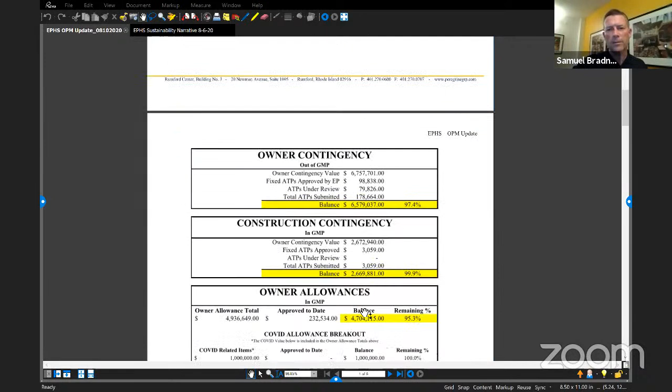This second page is a little bit of, we're trying to evolve this every month to make sure we're giving the team a good snapshot of where we stand now that we have the GMP approved. This is a little bit more layers of detail than what we saw last month, but really trying to give you the same information.

What we'll see on a monthly basis is three major blocks of allocation of dollars that are either in your project budget or in the GMP. The first is the owner contingency. When we look at the budget, these numbers tie to that. We have a total owner's contingency of $6.7 million. That is the owner's money to spend, whether it's on change orders coming out of the construction process or other items the owner may add.

What we see here is, and these numbers are a bit in transition, we're trying to reflect the changes that we know to date that have been approved by the procurement working group. That's the 98,838 number. But until we receive those changes in an official change order, the contract value will not change. So we're trying to give a real-time snapshot of what we've committed as well as what's under review, to get you to this total number, and then what the resulting math will be. There's always going to be a little bit of inconsistency because the change orders will lag behind the ATPs, but we think this gives you a good snapshot of where we are as we're starting to expend those additional dollars.

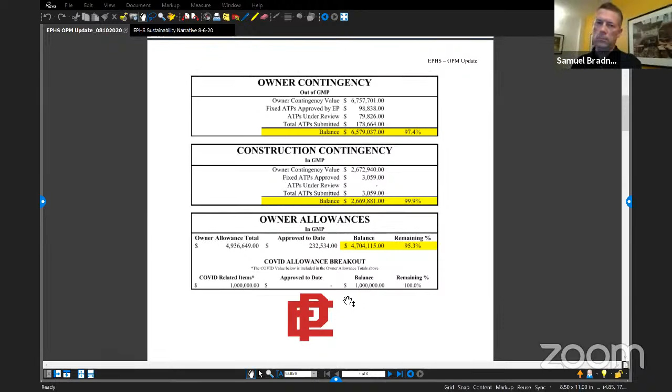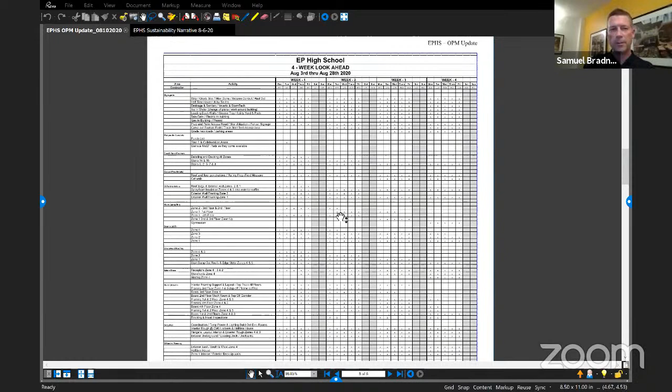So I'm actually going to use the pictures to kind of walk us through this document. And I know it can be hard for folks to read, but right now...

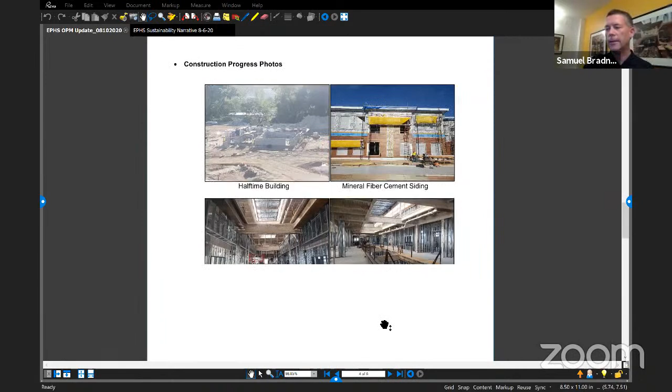We've got, and this is relatively consistent with last month, about 14 trades on site, significant work happening across all aspects of the project completion, site work, major utility work, major earthwork. This is a picture of the halftime building up here. Significant amount of earthwork happening in the back third of the property, from the building back to the eastern property line.

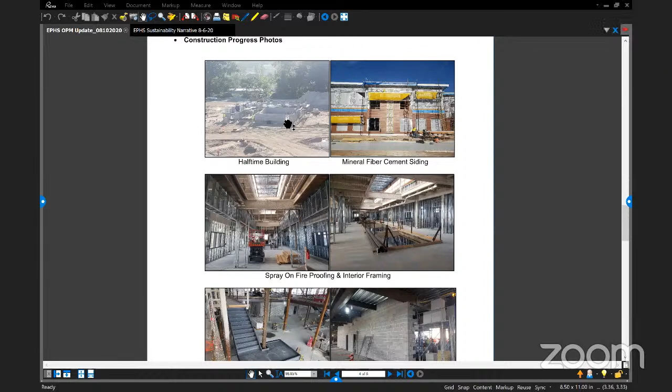Setting parking lot grades, setting major underground utilities. National Grid and Di Gregorio have set the new telephone poles to come in. The major underlying conduits from those poles have been set, at least to get us out to the building, and that work will continue as they sweep around to the transformer that's going to sit on the back of the site. From that transformer, the power distribution will then go to the halftime building and into the main building. Gas as well has come in off of the main street.

And all this is to enable basically the new construction access road that'll happen on the southernmost side of the site. So if folks have been out there recently, we've got that hard line of the construction fence and the barriers on the south end of the parking lot. They're working just inside on the other side of that with the utility corridor so that then they can pave and be ready for that traffic to alter once school opens.

Major work on the building. The roof is about 95% complete on the top as far as getting all of the EPDM or the cover down. They're still doing some work around it, but a large majority of that is up there. I was up there this morning.

Most of the building interior concrete work is done. All the major slabs have been poured, including even all the way around the walking track. I know, Gene, I think you were out last week - there was a group that was out 2 weeks ago, and I was out Thursday. So you can really start to feel how the two gyms and the walking track are going to feel, because that space is now completely enclosed with that walking track around. The auditorium, all the rake for all the seating is in place, so you really start to get a sense of scale of some of these spaces.

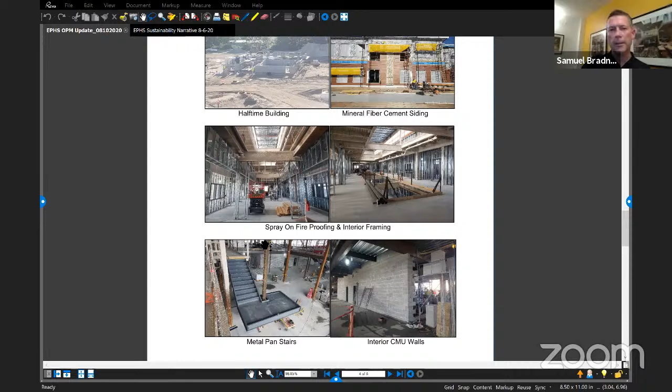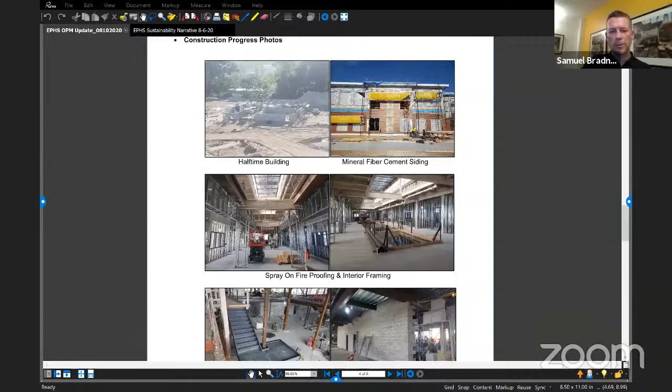And then finally, the exterior is really starting to take shape. So we're about probably 75, 80% done on the air vapor barrier, which is the barrier going up on all the exterior framing and sheathing. And now what we're also starting to see, and I'm going to try to zoom in here, although it might not come in perfectly, is the siding - the stone, the manufactured stone siding that's happening in the lower course.

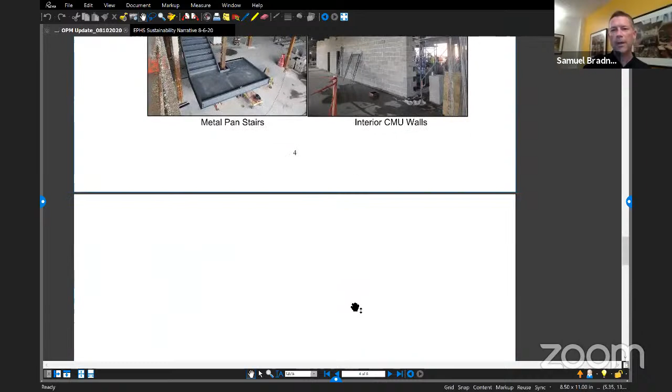And then what we're seeing is the HardiePlank on some of the upper floors and the HardiePanel happening on some of those upper floors. They're really starting to get a feel for the aesthetic of that exterior that we spent a lot of time on. We balanced a lot of the value propositions of the different materials, and you're really starting to get a sense of how all these components are coming together. And I think they look really good. It's hard for a building of this scale to come together and stitch together, so it's going to be interesting to see that start to come around.

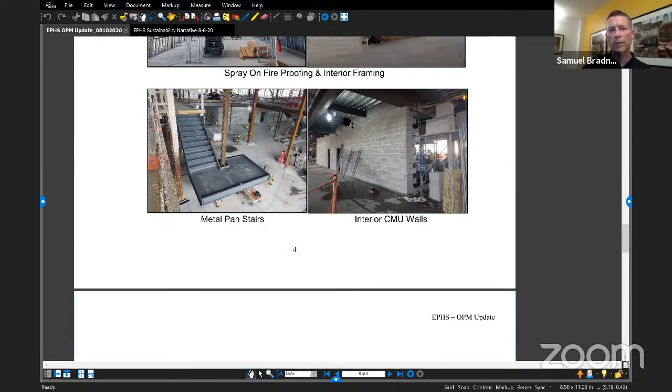And then I just showed on the previous slide, the halftime building - that work is moving ahead pretty quickly. You can see the walls coming vertical out of the ground, almost in parallel to what's happening in the building. And that's moving along.

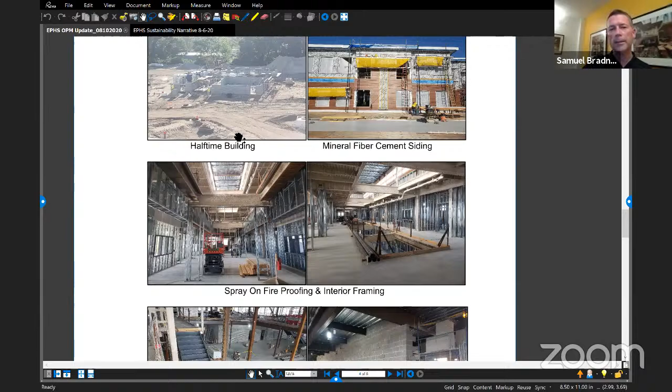What you still see to the north of the halftime building is the field - the stadium field has not started to take shape, and that's going to take a lot longer. That turf probably won't be going down until sometime in the spring. So that area is going to continue to serve as a stockpile area so that they can be moving material around throughout the property as they work through all the sequencing out there.

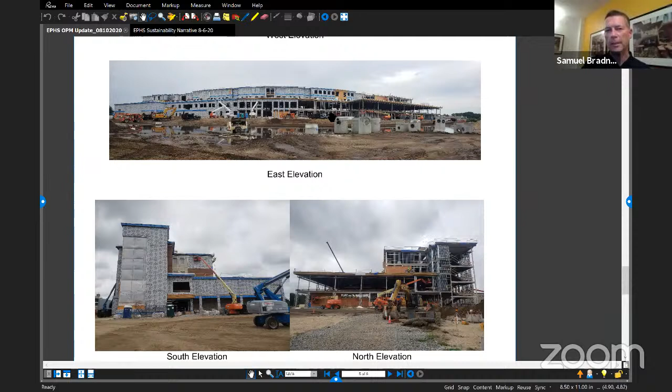Month to month, we're starting to see things not change quite as much when you look at these perspective photos. But if you walk out there, you can really get a sense of how things are shaping up.

I just want to spend a few extra minutes on the budget tonight. What we talked about last month is we're going to start to see these shifting dollars. Last month you saw the initial shift from the savings realized at the GMP that moved into the contingency. At that time, the contingency was at 6.7, which is reflected in the chart in the previous pages.

What we've done this month is the carve out of the demolition contingency we talked about. We knew with some of those savings, we were going to dedicate that $1 million — the savings specifically in the demo and abatement contract — and put it into its own line item, at least as a way to understand that it's got a place in the budget and that we'll hold it there as we go through the evaluation. Doesn't mean it'll all stay there.

I know, Gene, we talked about this before — unfortunately the abatement happened so late. You've set aside this money, is there an opportunity where that might be missed because you're holding onto that line item? I think that's something we're going to have to continue to evaluate as we look at the 5.7 number. As we start to consume those dollars, do we continue to hold the $1 million, or do we make some strategic decisions around that as the building's really starting to fit out and we're seeing those changes we know are going to happen?

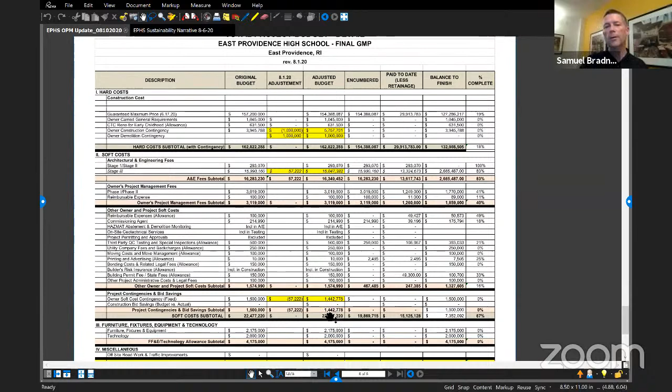Since that's a soft cost increase of 57,222, what we have is a decrease in the soft cost contingency down below of 57,222, and that's the reflective number below. What you'll see in the bottom line is these numbers don't change. This is the number we've been holding for over a year, 189,474, just slightly under the 189.5, which is your total bonded amount. So conceptually the bottom line doesn't change, but this middle column is where you'll have those adjustments happen on a recurring basis.

We should expect adjustments — reductions in owner's contingency and increases in the GMP — as changes occur. We'll have a monthly recurrence of that happening throughout the process, and this will be the ability to track it. We have a separate log where we're tracking all those by month, but this is kind of the roll up so everybody can understand where we are, a snapshot in time.

So the 10,000 foot view picture is, should anyone ask, the savings we anticipate by way of the approved GMP are basically now all allocated to contingency. Correct, yep.

And alternates that are still making their way through the approval process, Nate? Yep, and some of the ATPs reflected in the previous page are actually some of the alts as well. So those will come through as an ATP, and they'll look to that contingency line item as the source.

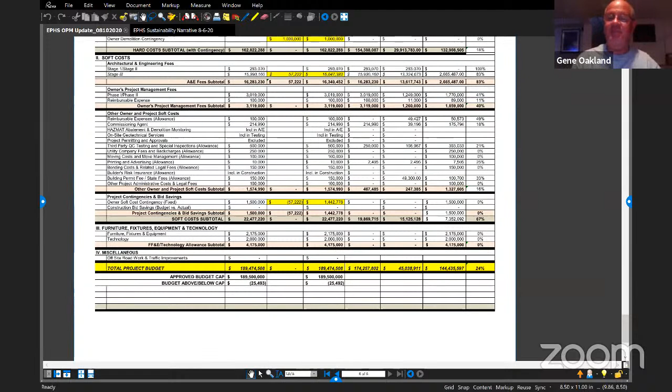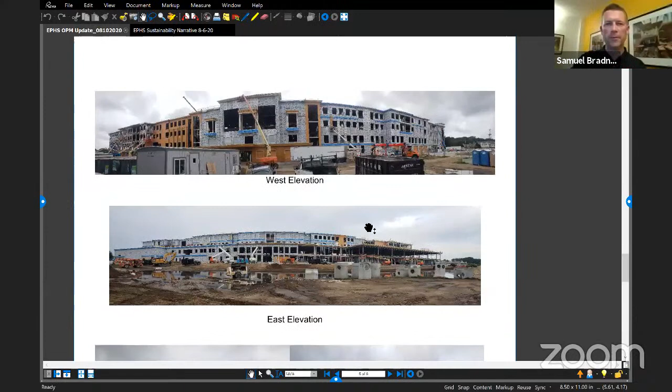Can we skip back to the photos, just a page or two real quick? Which page? This page? That's right there. That one is good. Just so, based on what we're looking at now, understanding that there's an extent to which we have to get the exterior of this building buttoned up before weather starts to set in, do we have any concerns given the current schedule that we're going to run into weather before we have it sealed up?

It's always imperfect, Nate. You'll have some windows in, you may not have them all in. Weather can come tomorrow, or it can come in December. I think what they're trying to do, and the zones also help, since we have very different conditions from the south to the north. As you work from this end to this end, you're much tighter on the south end and more porous as you work to the north. We're confident the team will use the means and methods they use on every project to ensure that as they're introducing elements susceptible to weather, they're putting the proper envelope conditions in place. It's imperfect, always a moving target, especially with the uncertainty of how weather acts at the end of the summer into the fall season. But they're tracking to be on schedule to get closed in when they originally said, which allows them to get to the interior finishes in those zones, even by floor, depending on which zone you're in.

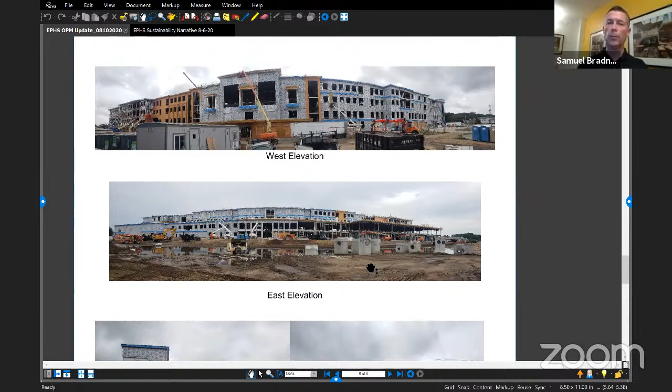There's a heavy level of scrutiny that goes through before we decide that. So that would go to owner contingency. And if there's a missed buy by the CM or similar activities, those would fall as in scope, and go against the construction contingency line item.

I'm just going to scroll up here, Manny, to that 2.672 number. So we go through a pretty rigorous review. Jim and his team, Darren who's the on-site principal working on the project out in the field, Eric, and then AI3's subs go through and make sure the sub's claim wasn't on the drawings. The entire team reviews it to either validate that or push back on it.

If it is in fact not on the drawings, then we go through the process of understanding what the ask is or what change is being requested. We validate the cost, and then it moves through as an ATP and ultimately as a change order. It's a pretty exhaustive process going through multiple layers before it gets to an approval step with the subcommittee or the working group.

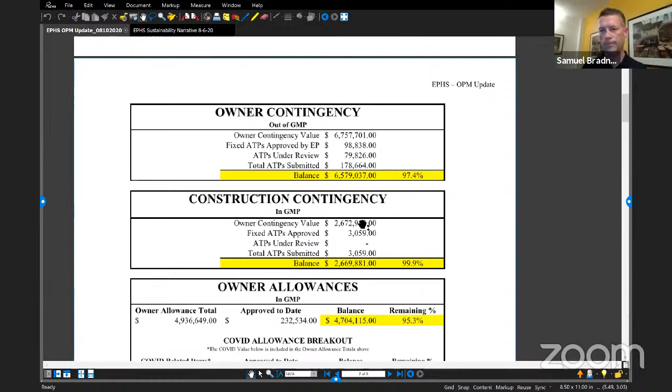Thanks, Sam. And even then we may question it, right, Sam? Yeah, it's fluid and filled with debate, and we haven't even started yet. We'll get into it more and more in the coming months as the trades realize either they missed something or something's not truing up, when you start going vertical and horizontal with all these elements in the building.

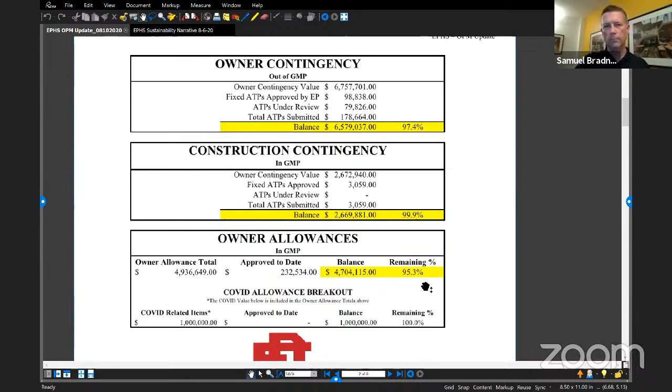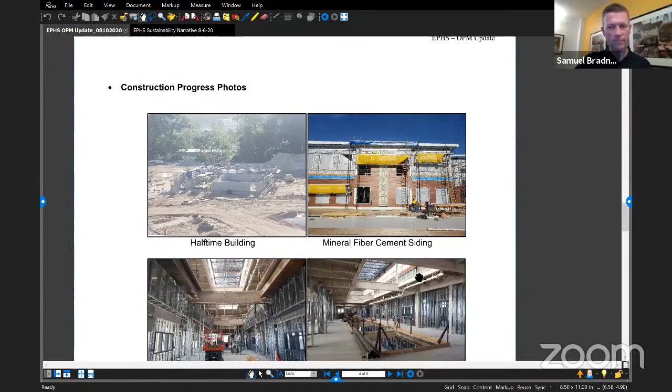Any other questions? All right, hearing none. Thank you, Sam. Let's go ahead and move on to the next item.

That would be the green sustainability initiatives. Is Jim going to give this presentation? Yes, I will, Chairman Cahoon.

Can I ask one question before you start? Can you explain, because I think I understand, but at the very beginning we were talking about the EUI number, the site number, and the source number. Could you explain to everybody the difference between those two? Yes, absolutely. Ben, would you be able to share the screen? I'll put that document up in case everybody doesn't have it with them. Or if you want to do that, Sam, that's fine too. Yep, give me 2 seconds.

All right, can everybody see AI3's memo up? Yep, great. All right, Jim, I'll scroll as you need.

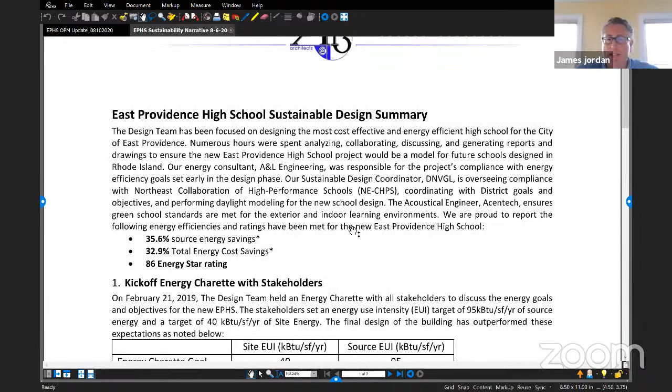To answer your question, Nate: source energy is a combination of primary and secondary energy, while site energy is what you buy directly for your building. Source is the sum of the primary and secondary energy used or consumed. It's a bit confusing, but it's terminology our energy consultant uses regularly with NGrid and the utility companies. It's based on kBtu per square foot per year usage for these categories, so there are two different numbers, site EUI and source EUI, used to evaluate building efficiency.

The EPA Energy Star rating, part of the EPA program, looks at site EUI and source EUI to generate a rating for your building, ranging from 1 to 100, with 100 being the most efficient building design possible. For East Providence High School, we're right at about 86, meaning on a national level your high school is 86% better, or more energy efficient, than other buildings in its category nationally. That's a great rating to have.

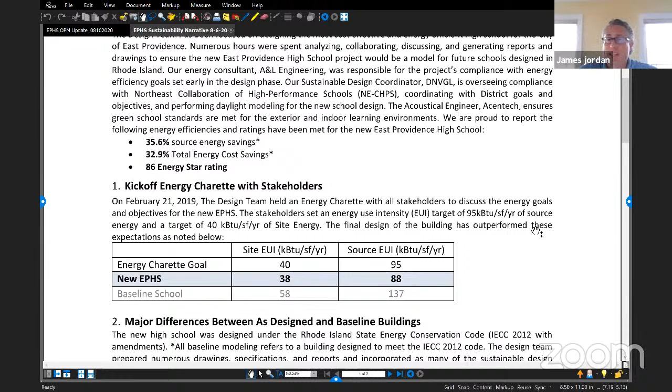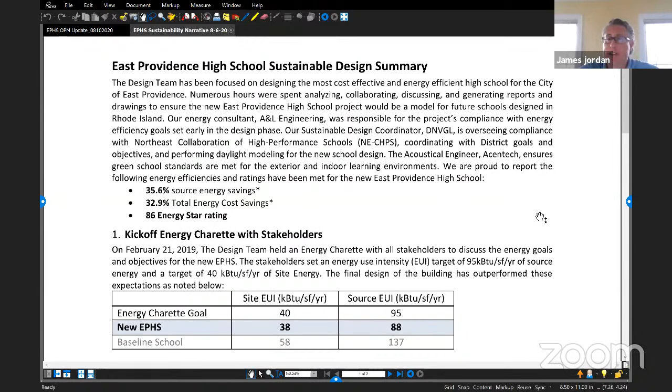Sam and Eric asked us to put together a brief summary of key points and sustainable design features included in the project. I wanted to identify the process we've gone through, because it's been a very involved and comprehensive process involving not only us as design team leader, but also specific consultants brought into the project from day one. We had A&L Engineering working closely with us and our mechanical, electrical, and plumbing engineers, and directly with the utility company, NGrid Gas and Electric, to ensure at every step we were meeting the target goals identified in our early kickoff meeting with stakeholders. We called it the kickoff energy charrette, as outlined in item number 1 in this spreadsheet.

A&L Engineering was really taking the lead on this project. In every phase, they evaluated our specifications and drawings to make sure we were in compliance, not only with Northeast CHPS standards, but also the standards and goals we set early on in that February 21st, 2019 meeting with all the stakeholders and utility grid representatives.

We also had another very important consultant as part of the design team, continuing to work with us, focusing on Northeast CHPS compliance, which is a major factor we have to ensure with the Rhode Island Department of Education. They give the project 2% to 4% incentive points if you're in compliance with Northeast CHPS, to make sure the school is designed as a green school. So we brought in DNVGL, John Amber, who's also an architect, based in San Diego. They assisted us in putting together all the documentation in the construction documents so Gilbane knows what items are important, what prerequisites are required, and what goals we set for the project to be as energy efficient as possible. Right now, we're on track to receive that 2% reimbursement from RIDE because of our energy efficiency goals.

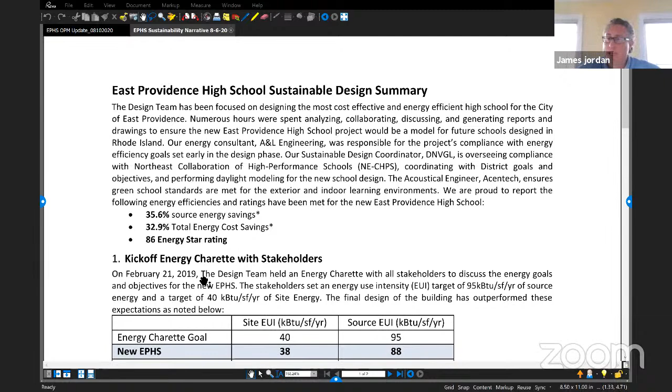So in a nutshell, some key features everybody should be very proud of, as a design team we had a very tight budget on this project. Everyone went through the pain of identifying value engineering items at each phase to keep bringing the project in on budget. That was paramount for everything. So we tried to pack in as much sustainable and green features into the project as we could.

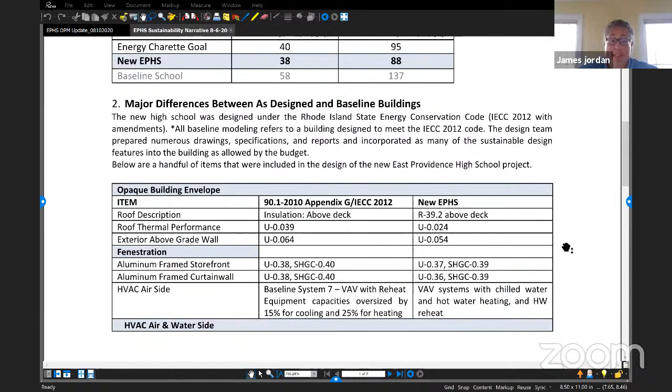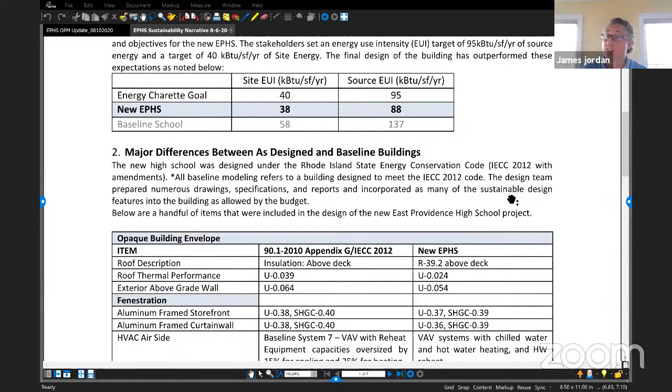We're proud to announce that with 100% of the documents completed and the final energy report completed by A&L Engineering, we received about 35.6% source energy savings for the project. That equates to about 32.9% of total energy cost savings. We have an 86 Energy Star rating out of a possible 100, so the building is very energy efficient, and everybody should be very proud of that.

As I mentioned, we had that kickoff energy charrette meeting with stakeholders at the Martin Middle School back in February of 2019. All the professionals were in the room, including Tony and a lot of his staff. We identified a realistic but aggressive goal at that energy charrette: a site EUI of 40 and a source EUI of 95.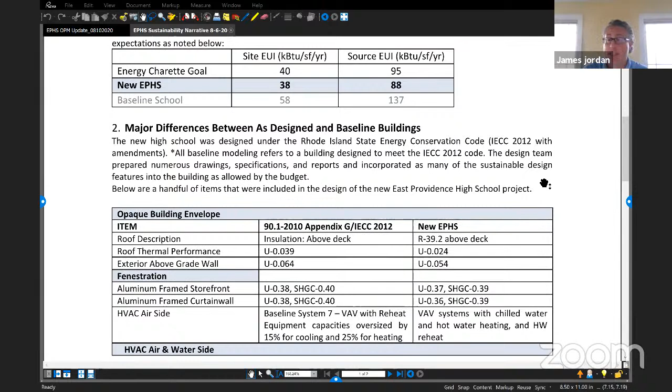Based on the final 100% energy model done on the project, now that the design is finished, we came in at 38 for the site EUI, and the source EUI is 88. So we're well under target of where we wanted to be, and that's great news.

Whenever we talk about energy savings or cost savings, the building is always compared to a baseline building designed at the same square footage to meet the current energy code and building code. That's always your baseline. Energy efficiency is realized when you exceed that baseline benchmark. We're not designing to old codes or an arbitrary number; the building must meet current building and energy code, then exceed that by, in this case, 30% minimum, to have superior energy performance as NE-CHPS dictates, to meet that 2% additional reimbursement from RIDE.

So that was always the minimum target we wanted to get to, above and beyond energy code compliance. If you look at that last line in the first chart, the baseline school site EUI would be 58 and the source EUI would be 137. We're at 38 and 88 respectively for that.

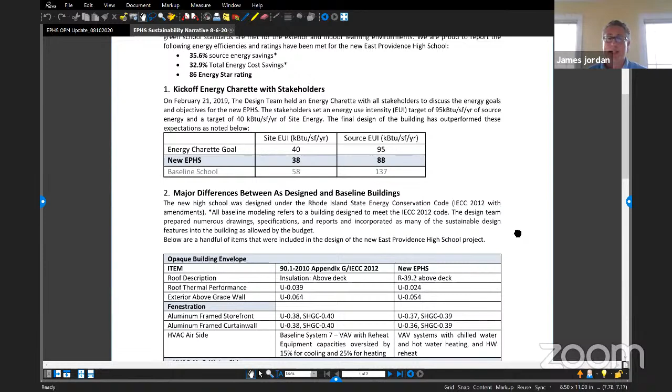So that's a tremendous accomplishment for the budget we had for the project. So what does that all mean, and where are these energy savings realized? I put together this quick chart for you, showing the major difference between an as-designed building of this size for a high school population to meet code and baseline building designs.

So for instance, if you look at the building envelope, not to go over all these in too much detail, but a simple one we always look to is what we've done for the roof assembly—not only the insulation, but the entire assembly from the metal deck to the outside PVC membrane. That is an R39.2 value, which is far above what's required by code.

All these items are modeled with A&L Engineering to determine that at some point, putting in more insulation doesn't become as great of an energy saving feature, or it's not really worth the money you're investing. There's a fine line between how much do you do and how far above and beyond code do you really push this, to realize that extra money you're putting into the project.

We also ran numbers on triple glazed windows, and we realized the cost impact of the project was too great for the energy efficiency trade-off, so that was taken off. I didn't put it in the chart here—I just showed you the ones we put into the project.

So the thermal roof performance—the U value, which is the thermal resistance of that entire assembly—for a baseline building is 0.039 U value. The idea behind U value is the closer to zero you get, the more ideal and energy efficient the assembly becomes. We actually realized a 0.024 U value for the thermal roof performance.

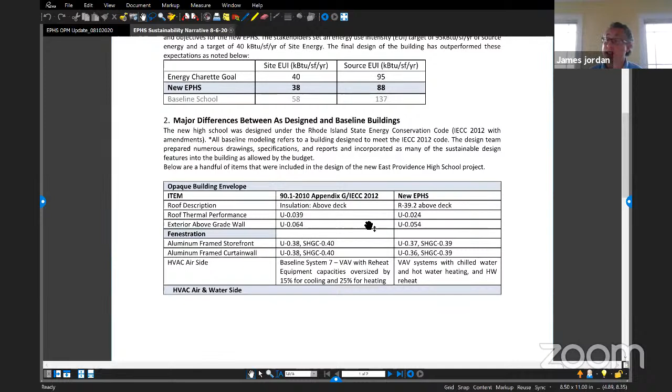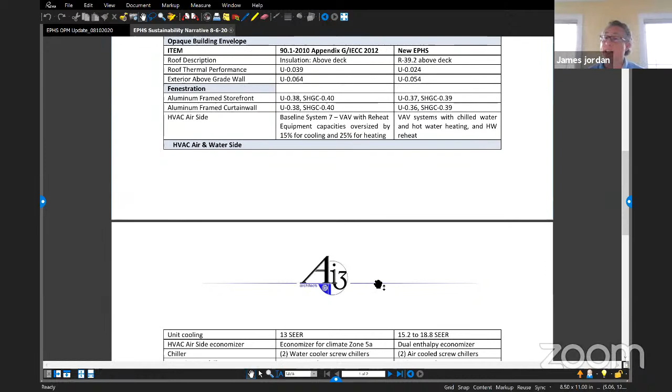All of our HVAC airside systems are variable air volume systems, which modulate according to occupancy. We put CO2 sensors in each occupied classroom so that as more people occupy a space, more CO2 is given off. These smart VAV boxes in the ceilings sense that increase in CO2 and ramp up to give more fresh air in the space. As students leave, it ramps down and scales down the speed of those boxes to become more energy efficient, and we realize energy savings by doing that.

For unit cooling in residential units, you could get a SEER rating as high as 23 or 24 for really energy efficient air compressors for your home air conditioning. Code is 13 SEER, the rating we have to meet. We've done 15.2 to 18.8 SEER rating on a lot of the units to realize more energy savings there.

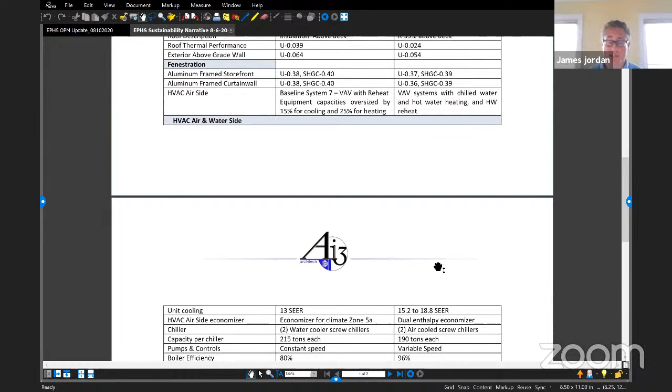A handful of other items—pumps and controls. Baseline is constant speed pumps; when they're on, they're on, there's no variable to those. We use all variable speed. For your residential pool, for instance, if you use a variable speed pump instead of a constant pump, you could realize savings of 50 to 75% more energy efficiency by just using one variable speed pump to heat or move water around in your pool and your own house.

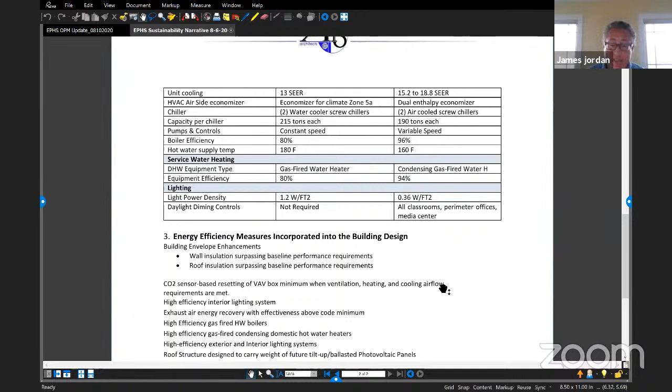Boiler efficiency baseline is 80%; we're at 96% boiler efficiency. We have condensing gas-fired water heaters, and baseline is gas-fired water heaters. The condensing gas-fired water heaters are much more energy efficient because they use heat that's exhausted through the flue, recapturing that instead of using preheated building air. It's actually using the heat that's going to be exhausted to the exterior through the flue gas, capturing that, and creating more energy efficiency that way.

Our equipment efficiency—80% is the baseline. We always try and target 94 to 96% for all the equipment we specify for the project. And it goes without saying, daylight dimming controls are a standard in all of our projects for all classrooms, offices, media center, etc.

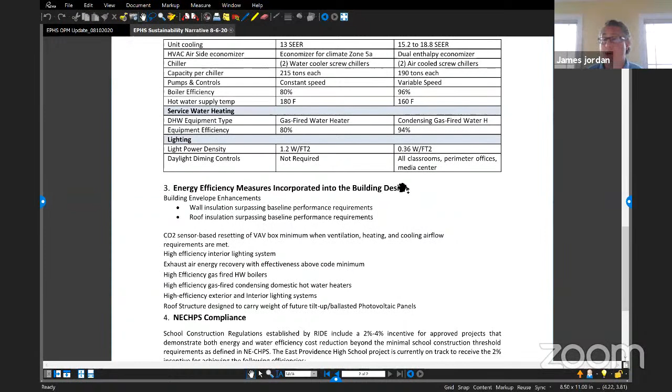One thing we're really proud of is the light power density, not compromising the amount of daylight in schools, as well as the artificial lighting in each classroom. The watts per square foot used to be well over 1. About 10 years ago, you could get 3 or 4 watts per square foot, but that has dropped to 1.2 for code. We're at 0.36 watts per square foot. All the lighting inside and outside the building, including the parking lot, is LED right now, and that's a sign of how much daylight is getting into this new building. So we could drop that artificial lighting requirement to 0.36 and still meet code requirements for what students need at their desk to learn.

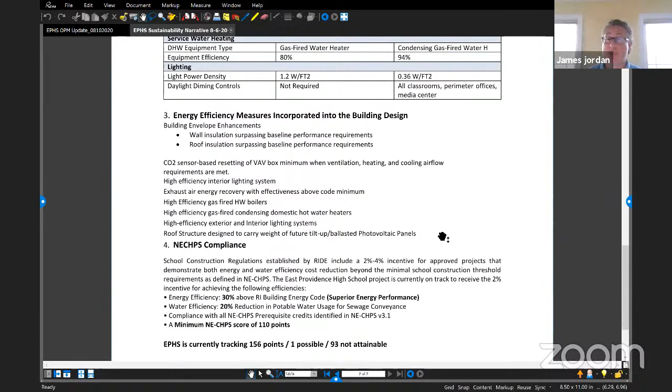Those are some of the features we incorporate to realize the savings I mentioned earlier. There's a number of energy efficiency measures in the building design: building envelope enhancements, increased wall insulation surpassing code, as well as roof insulation. CO2 sensor-based resetting of the VAV boxes in all learning spaces. High efficiency interior lighting systems—everything is LEDs, including stage lighting and exterior parking lot lighting. We're capturing exhaust air energy recovery above code minimum, condensing hot water gas-fired boilers, as well as water heaters, and high efficiency exterior and interior lighting systems.

The roof is also designed so you can place, through a third-party vendor, tilt-up ballasted photovoltaic panels. We increased the structure to carry that load, and designed the roof and some of the interior conduits so it can be funneled to zones where you can terminate those PV panels in the future. We didn't have the money in the project to come up with $5 million to populate roughly 195,000 square feet of roof area with PV panels, which could have gotten you close to net zero. But if there is funding for that in the future, your building could have a tremendous impact and get close to zero net energy.

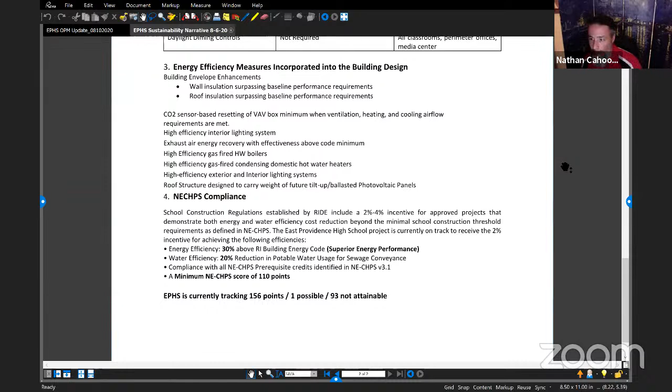Talking about the potential for PV in the future, I've recently seen this one company that propositioned the mayor. They're working with Bank of America, and they don't use PV, but these mini wind turbines that are anywhere from 6 to 10 feet high, supposedly super efficient. I'm not saying that's the direction we necessarily want to go, but as you see this technology evolving, maybe in the future, we didn't put the PV cells up there, but now maybe we have an opportunity to grab this other thing that's new and hot.

So Kathy, I don't know if you've heard about that at all. I do think the Bank of America building down here on Pawtucket Avenue is going to do it, and I'll be keeping a close eye on that. But if that looks like it's having results, I think the city is going to be very interested in putting those units in too, and they're fairly inexpensive. I think the guy said they cost somewhere on the order of 24 or 25K per.

So just food for thought, that's something maybe we can achieve down the line. No, that's one thing I haven't heard about yet from the mayor. Okay, I'll keep an eye on that and let you know if anything good comes out of it.

And Nate, I think just as a reminder, like Jim said, PV is still an option. You are PV ready, which is the NE-CHPS requirement. So you've got the structure to support the array, you've got raceways through the deck to get you down to the electrical rooms. So there's certainly an opportunity for you guys to think about rooftop or other options on the property.

And we brought it up in our smaller working group about just the timing of that, and thinking through, if it is even something the community wants to entertain, better to start making those decisions now, while you're under construction, as opposed to after delivery.